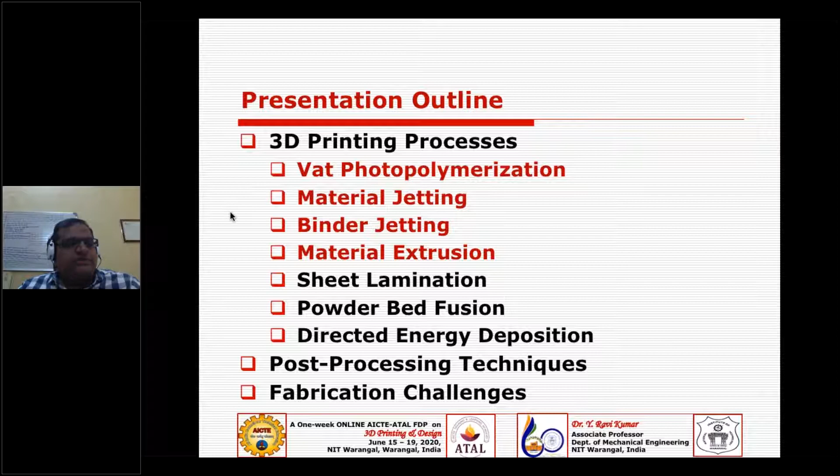So then we'll move on to the sheet lamination process. What do you mean by sheet lamination? The name itself tells you that the raw material may be taken in the form of a sheet, and you will be laminating those sheets. So what are those sheets? You have the raw material in the form of a sheet, either paper, composite, or even metal nowadays.

I'm going to even talk about some of the metal systems, from ultrasonic consolidation there is a process. Right from the beginning, I'm going to talk about the first generation LOM machine, which along with the SLA, from Helisys they have started this process called LOM, that is laminated object manufacturing. The name goes to Helisys, the early manufacturing systems developer from USA.

And then slowly it has moved to a different approach, from Helisys to MCOR. It's the Irish technology, where you are going to use a knife or inkjet printing combined to make the parts under this MCOR technology. That also we are going to see.

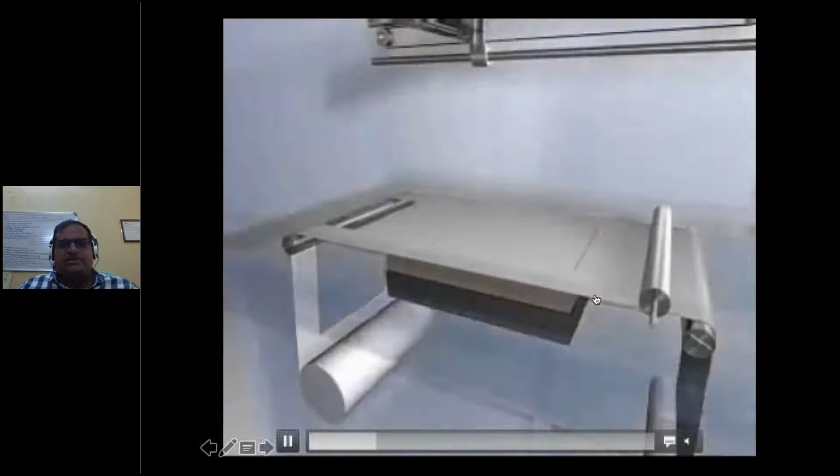A laser will be tracing the cross section, but this is a contrasting process. Normally using the laser, you cut the actual cross section, but here it is reverse - you cross hatch the system, leaving the cross section alone. That is a bit different process here, and because of that you may be wasting a lot of material.

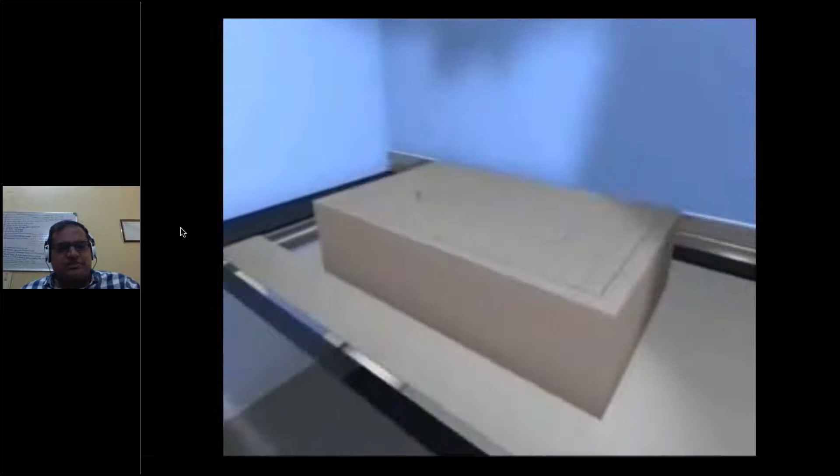Normally you claim that additive manufacturing is 0% scrap, but that statement should be exempted for this technology. Why? Because you are going to have more scrap here, since you are cross hatching the object rather than depositing the actual cross section. So this is about the Helisys LOM process where they started.

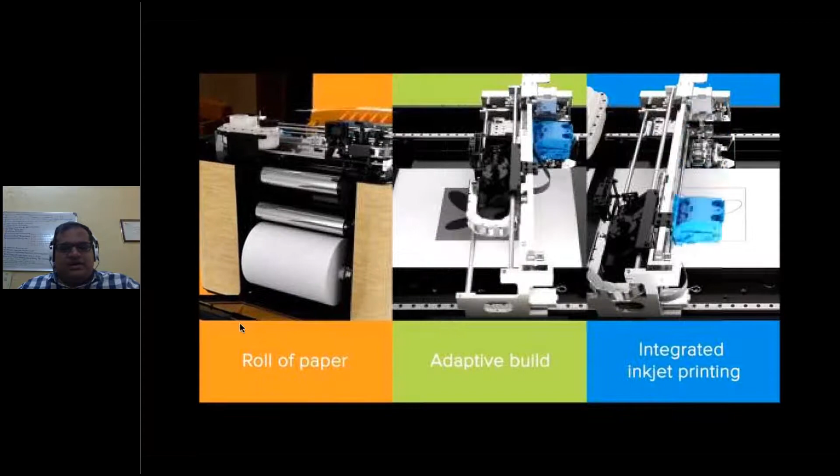Now there is a recent development from MCOR. This technology basically takes ordinary paper as the raw material. The printer looks something like a Xerox machine size, or a big size printer, or an all-in-one. Here the raw material will be paper, and then you will be additively building.

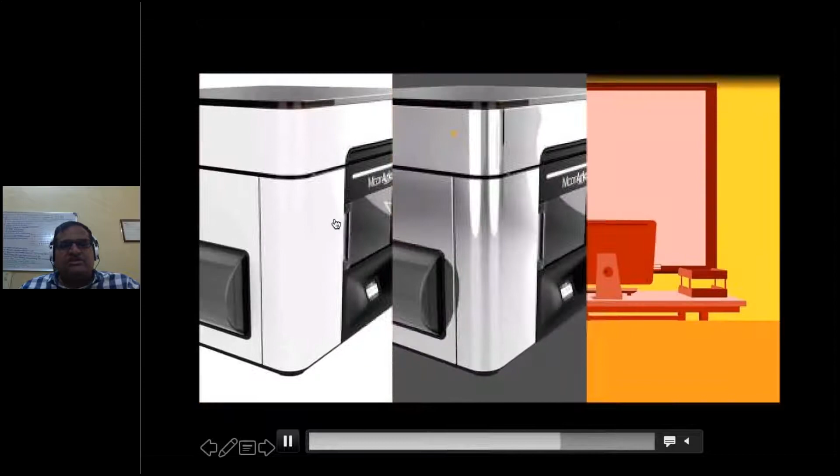You have some integrated inkjet printing also to give the colors. So it is the combination of adding or sticking the papers together, and then jetting the ink in colors - all in a colorful world. It's a less expensive machine, because you may be using something like ordinary paper as raw material and colored ink.

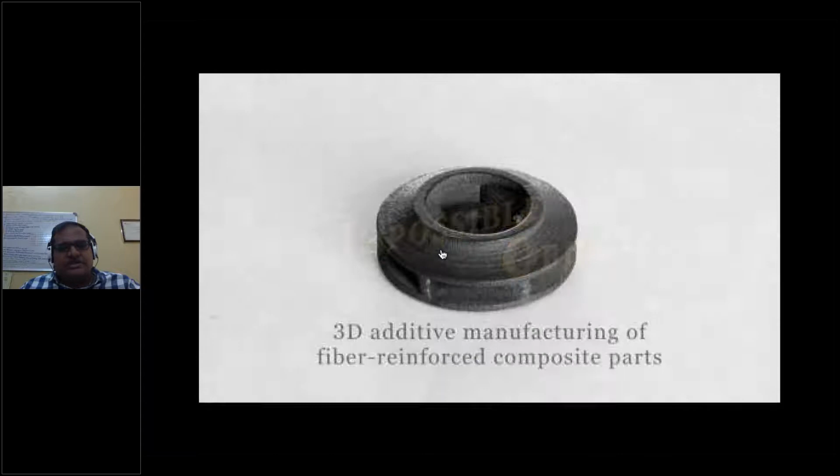So this is about the technology called MCOR. If you see the material developments, from paper you are now able to print fiber reinforced composites with the sheet lamination process - that is with the Impossible Objects technology. We can see the fiber reinforced composite as printed from this technology.

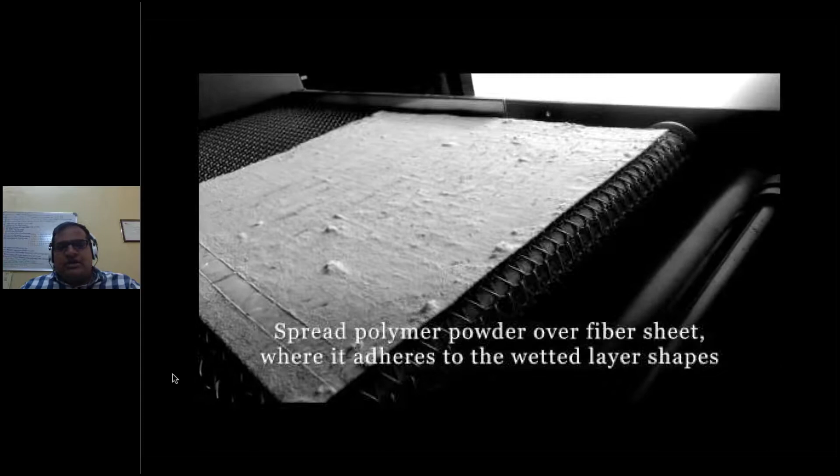Of course any technology should start with a CAD model, and then you have a fiber sheet to be printed. You use the inkjet heads to contain wetting fluid and jet it onto this fiber sheet, and spread a polymer powder on top of this fiber sheet, where it will be adhered. You remove the non-adhered powders, and then you can see all these bitmap files get printed.

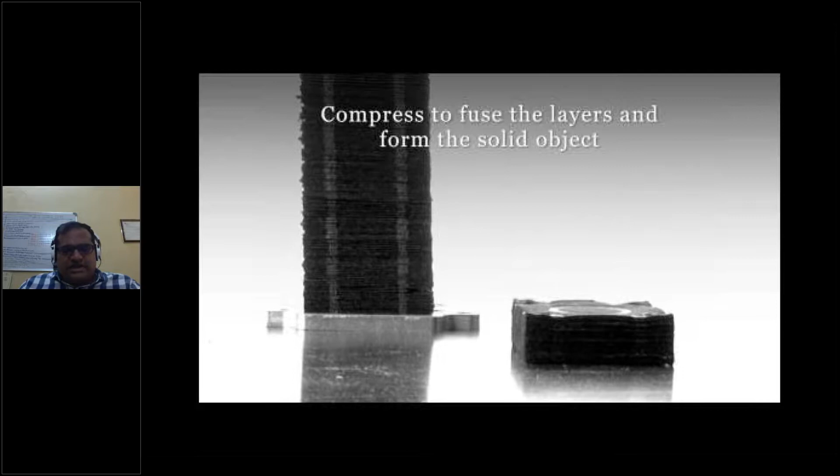Now you take all the individual sheets and stack them together, and put it into the post processing unit where you compress it. After compressing, you remove the uncoated fibers, and once you remove that, you are left with a fiber composite. So this is how it works - that is the development from paper to composites.

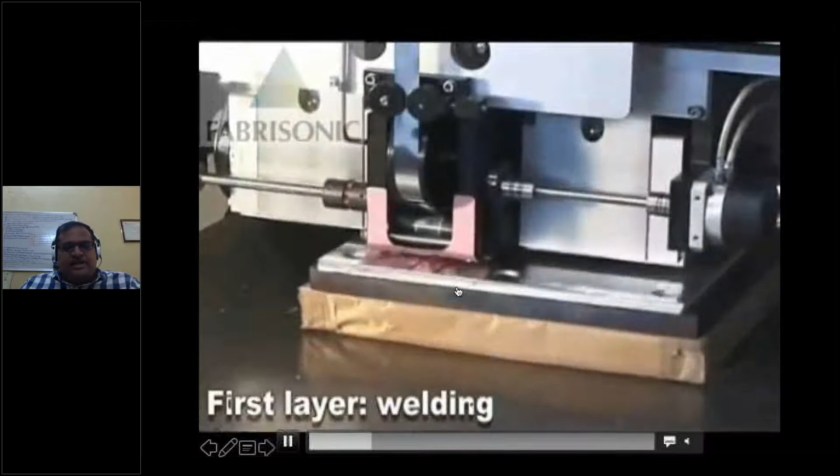Of course, now you can also print in metal. It's a bit of a hybrid process here, where you will be using even machining, using an end mill cutter also in between. First it starts with welding - by using ultrasonic welding, you join these metal tapes together, followed by an end mill cutter removing the excess portion or trimming.

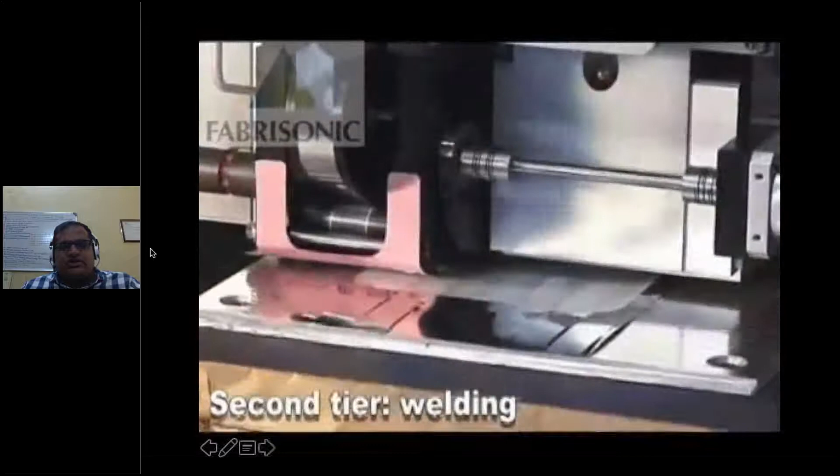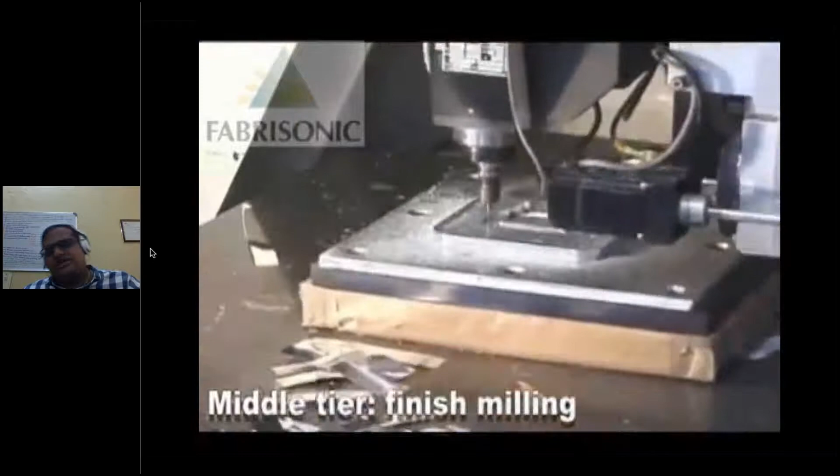So you get the advantages of both additive and subtractive here. You are adding these metal tapes together by welding, and removing or finishing is done with the end mill cutters. We need to even run the CNC program, generate the CNC program to run the end mill cutting. We can see this is going on right now, the welding process, and wherever there is subtractive, definitely you have a lot of scrap involved.

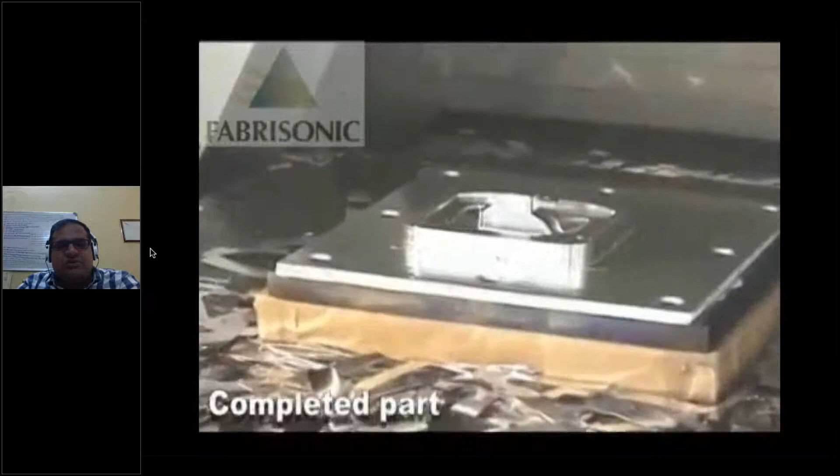We can see this is going to build layer by layer with the metal tapes, and finally you end up with a metal part, which started with a CAD model, a digital model of the mold. Now we can see this is the CAD model, and that is the metal die.

So these are the developments under this sheet lamination process, and we'll see one by one. As I mentioned, LOM was the previous technology where carbon dioxide laser used to be the energy source to cross hatch the cross sections of the model derived from the CAD.

During post processing, you remove these cross hatched cubes, normally called the decubing process. The person doing post processing must know about the geometry, otherwise he may erroneously cut the actual cross section, which becomes a challenge for the person doing the decubing process.

This is basically one of the initial processes, and I am proud to say that I used this machine during my postdoc in the US. Right now you cannot find these machines, they got outdated, but these were the earlier machines. In India also there were one or two machines, including one at Anna University, though I don't know if it's working now. But LOM is one of the first among the first generation 3D printers.

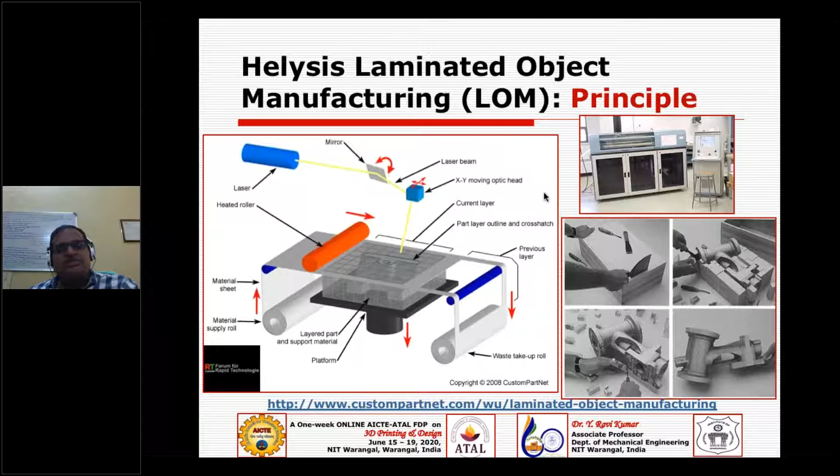So then there were a lot of developments. From MCOR, where paper is the raw material, by using inkjet colors you could make different colors. This is otherwise called selective deposition lamination, or SDL, where you can make colored, very realistic looking parts.

This process starts with taking a paper, using a printer adhesive, and through an inkjet printer you print that ink onto the paper. Then you laminate those papers and cut the excess portion through a knife, not a laser. Earlier people used a laser, but laser is a costly element. Then people realized cutting paper doesn't require a laser, and using a knife is sufficient. That's why nowadays these machines are very cheap.

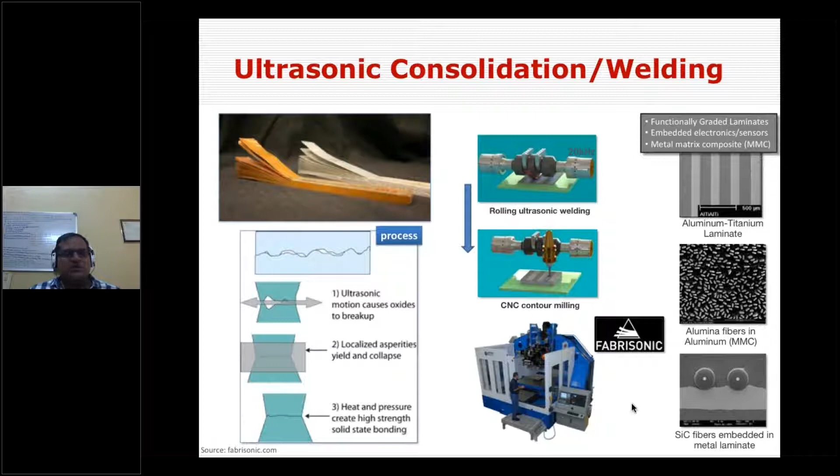I may be very crisp or brief, because I have to cover other technologies, so I'll move on to the next process, which I already introduced through video.

All these are fiber reinforced composites, made through laminates. This is the process from Impossible Objects, the lamination of fiber reinforced composites, which is about the sheet lamination process. Next we move on to the next kind of process, powder bed fusion.

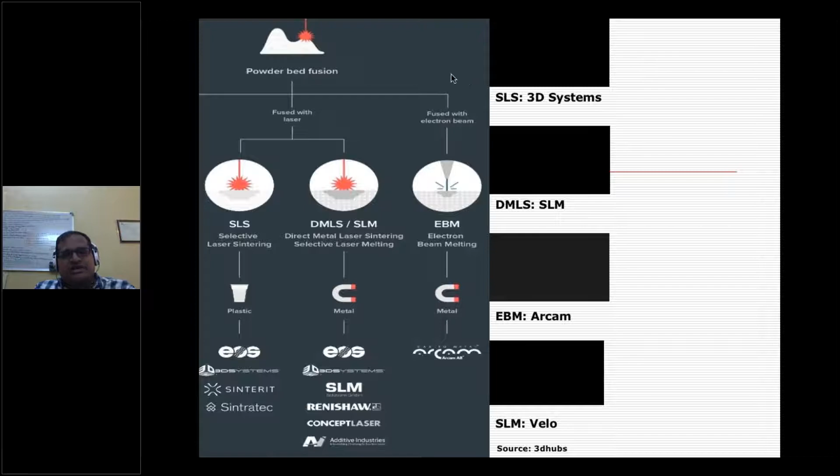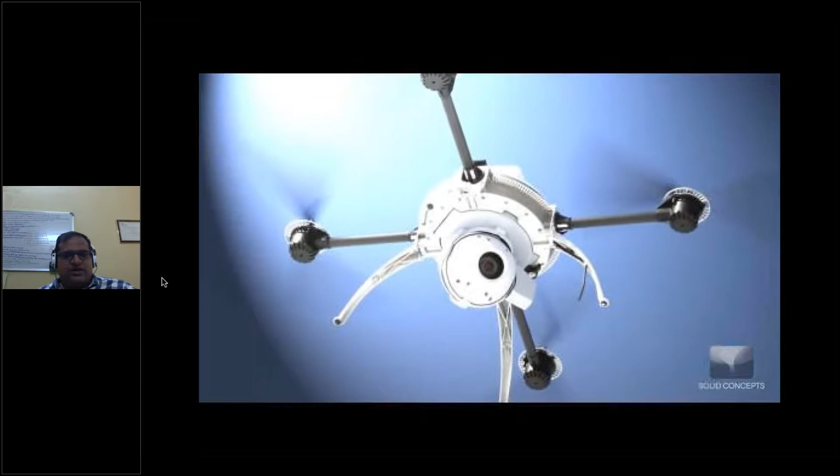We'll start with the early system from 3D Systems, called selective laser sintering. The raw material is powder, maybe around 50 to 100 micron size powders, and this is the SLS system. We start with raw material in powder form and lay a bed, since it's a powder bed system. From the powder you are able to get polymer parts, or basically composite parts. Predominantly it is polymer, but composite can also be done.

As usual, you start by taking the CAD file and slicing it, then send that data to the printer. In the printer you have a laser along with the powder bed recoater, which recoats the powder, and then the laser sinters your powder particles. By using laser power, you could sinter or melt the powder particles, getting bonding between them, and it goes layer by layer.

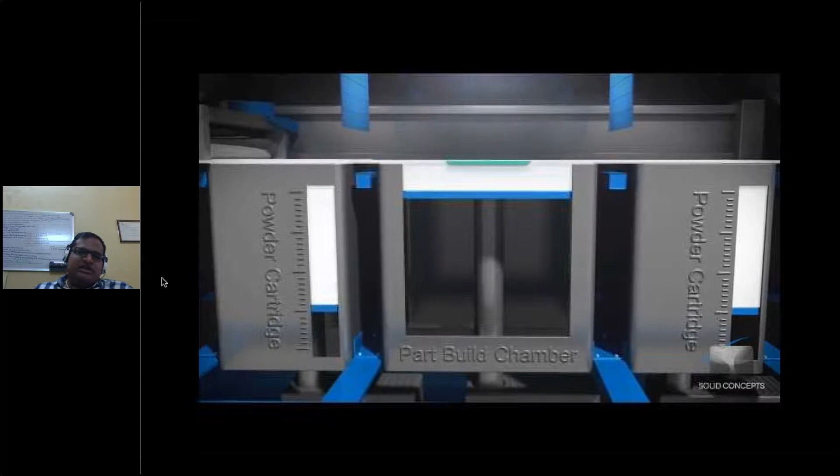So we can see where the part will be built at the middle, that is the part build chamber, and you have the powder cartridges on either side. While recoating, the excess powder will be collected on either side of the bin.

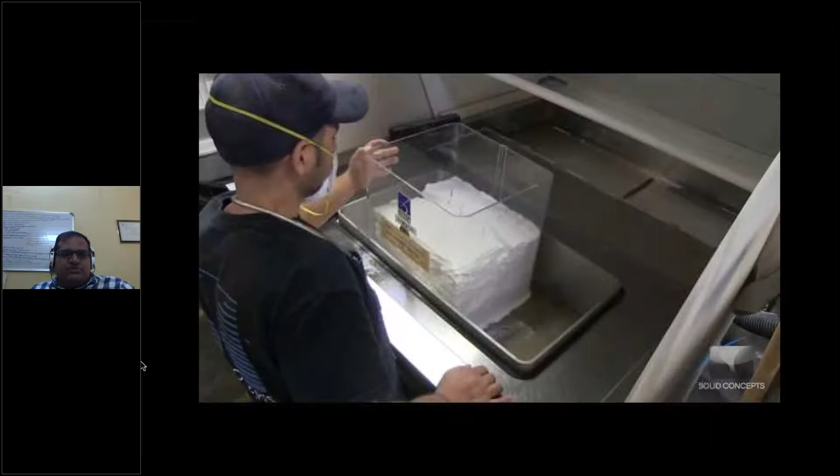Once you have done all these layers, you can unload the powder through the build chamber and take it out, where you find something like a cake of powder. From the cake of powder, you remove the loose powder and reuse it. From the bed of powder, you can see the actual part that got sintered.

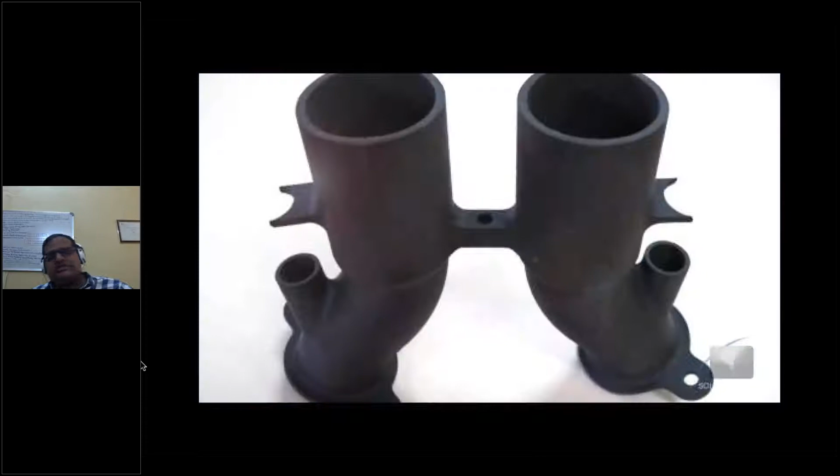So you get that part after post processing, which you can see. This kind of parts can be made. After post processing, you can see it has enhanced appearance, or maybe mechanical properties, microstructural properties, thermal properties, or electrical properties, whatever property you are looking at. So choose the appropriate post processing technique to improve your quality.

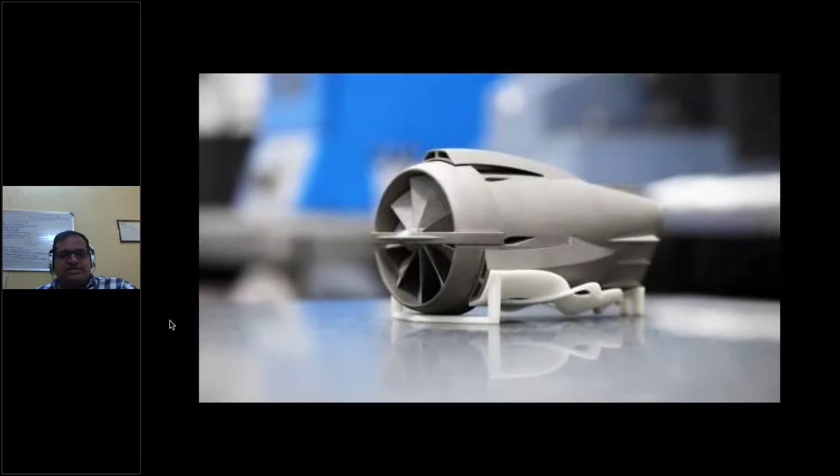Now we'll see the second generation machines, called direct metal laser sintering or SLM. These are the metal parts which you can see, and it works with the same principle. You have the raw material as a powder, but in this case it is not coated with a binder - it's direct metal powder, and it is getting melted. That's why it's called direct metal laser sintering, or selective laser melting - you are selectively melting from the bed of powder.

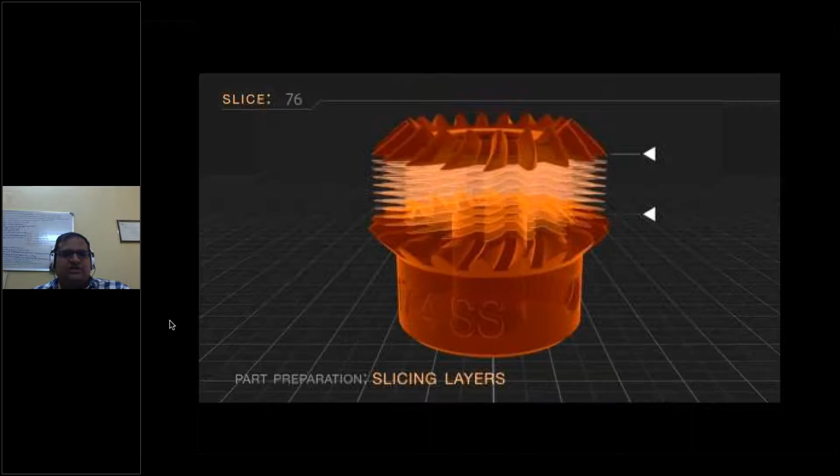As per the cross section, you will be melting. Any process starts with the CAD model, like the demo we gave on 3DXpert yesterday. Similarly, each machine supplier will supply their own software. Once you slice that model, you send the data to the machine. In the machine you have the laser and the recoater - the recoater will sweep the powder, and your laser will sinter, or rather melt, the powder particles.

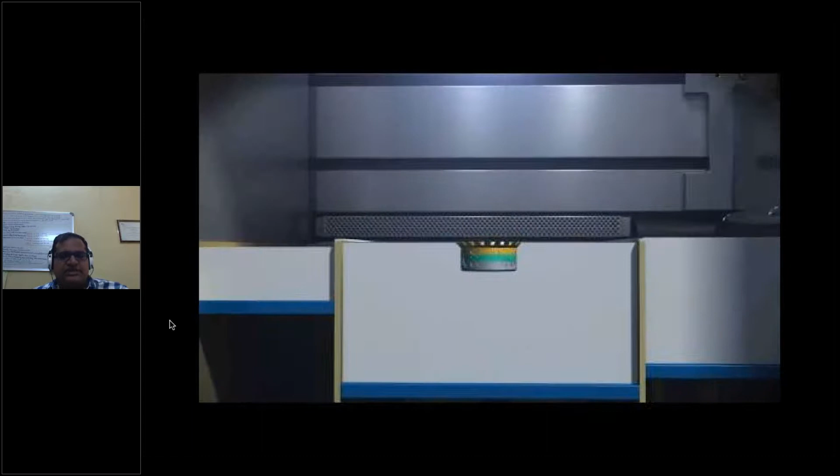There is a chance of oxides forming, because you are working with iron - iron oxide will form, titanium oxide will form. So there must be an inert gas. Normally in our lab, for reactive materials you must use argon as an inert gas, and for non-reactive materials you can use nitrogen, which is a bit cheaper than argon. You're supposed to use any one of these.

Once you've made this, you can see there are supports, and the supports are also metal, so you have to do a lot of post-processing here. To remove the metal supports from the substrate, we need to use blasting - sand blasting or air blasting. If not, it requires some super finishing operations also. Then finally your part is ready for application. So this is about direct metal laser sintering.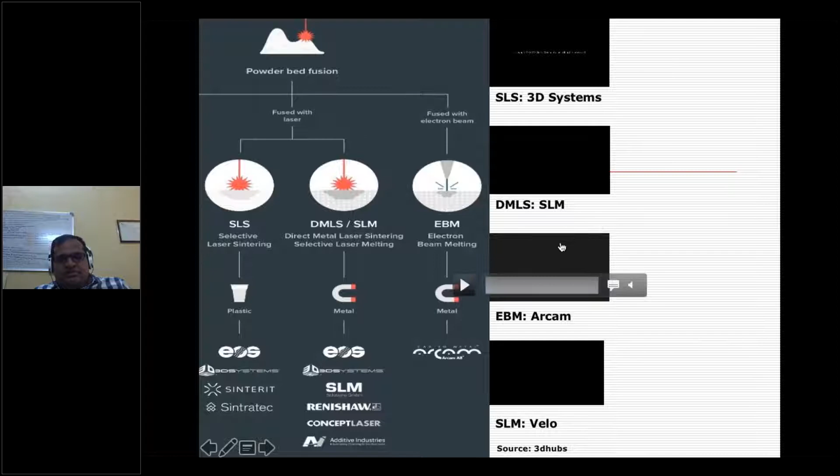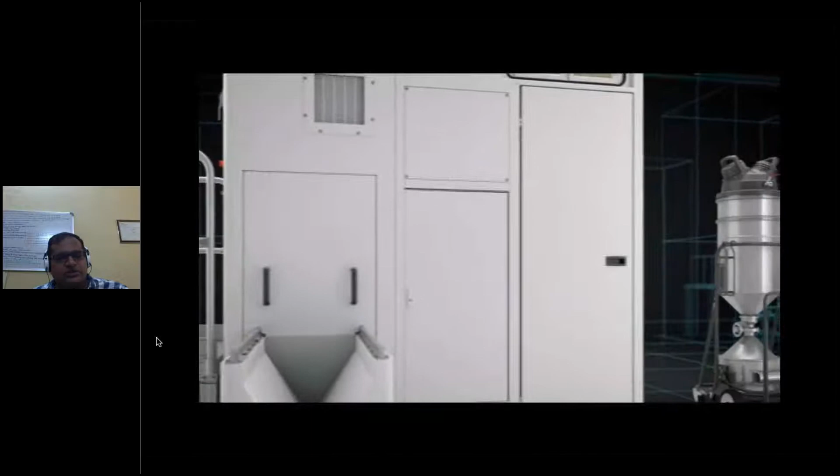As I already mentioned, so far we've seen only the laser in action, but you also have technology from Arcam, called EBM - electron beam melting. Here, the same powder is used, but one more challenge is, once you are operating with the electron beam, instead of inert gas you need to create a vacuum. Creating a vacuum is challenging, and not only challenging, it's very expensive compared to working with a laser. So you have a different ball game here with electron beam - you need a tight vacuum chamber. Recently GE has taken over this Arcam company, because GE is looking to make at least 50% of their parts through metal 3D printers.

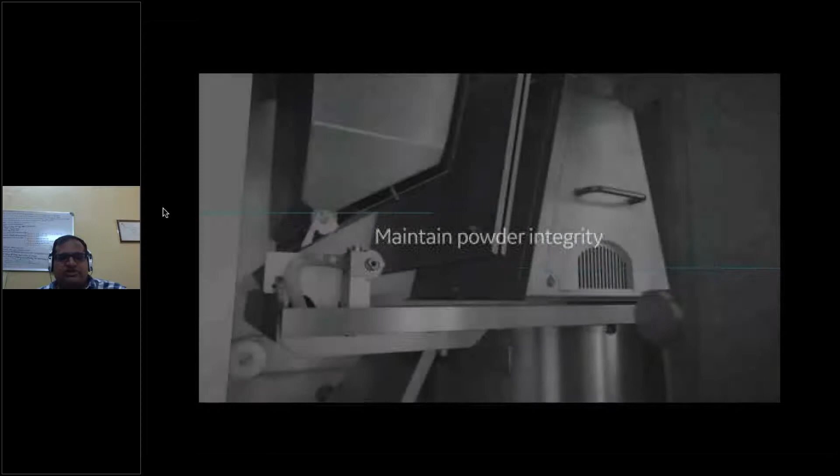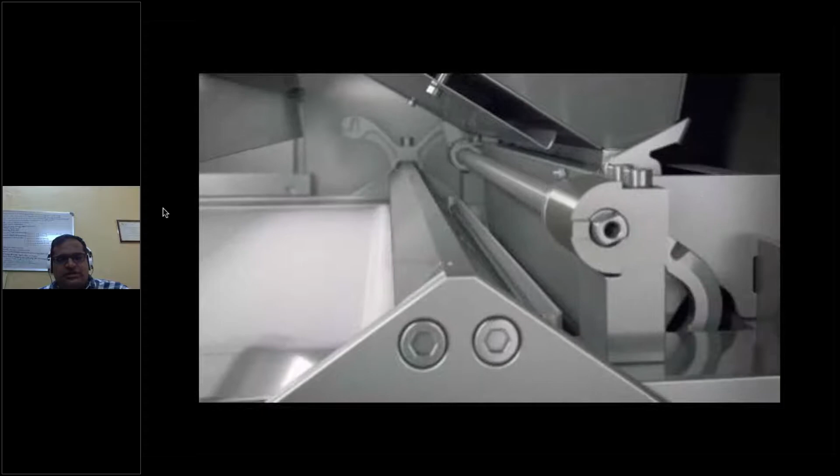Then we need to start with the powder, and as I mentioned, you have a vacuum chamber. You take the powder, it should be loaded here, and spread like the recoater, like with the previous system. The recoating system, there is no difference - you have a recoater which will spread the powder onto the bed. And of course, instead of a laser, now you have an electron beam.

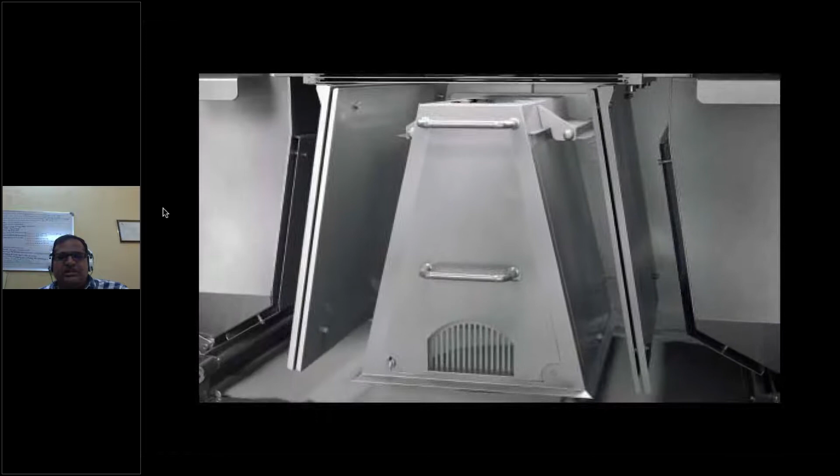Of course, this is the vacuum chamber, where everything is under vacuum, and the electrons will come and melt the material. You may be having a 6 kilowatt beam here, or otherwise you can have a build speed up to 50% faster. Now you can see the electrons are in action.

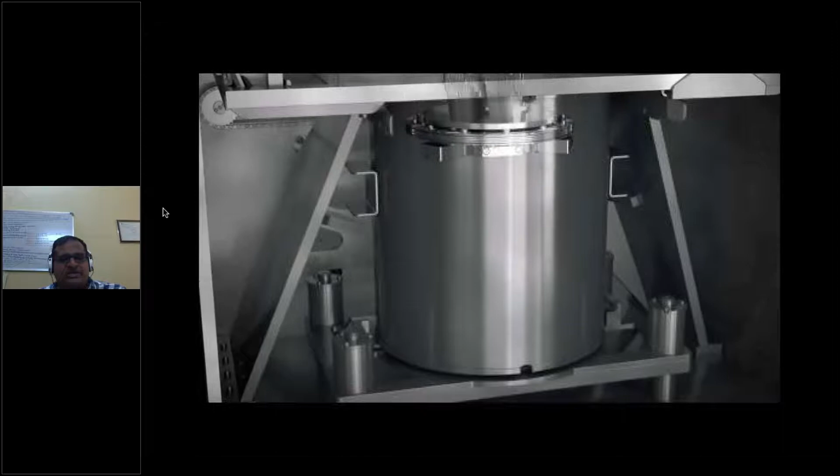So instead of laser, you have electron beams, which can have a 250 by 430 height, Z height build volume. This is a GE component, a blade for a gas turbine engine. So you can make this blade of the gas turbine engine using this process.

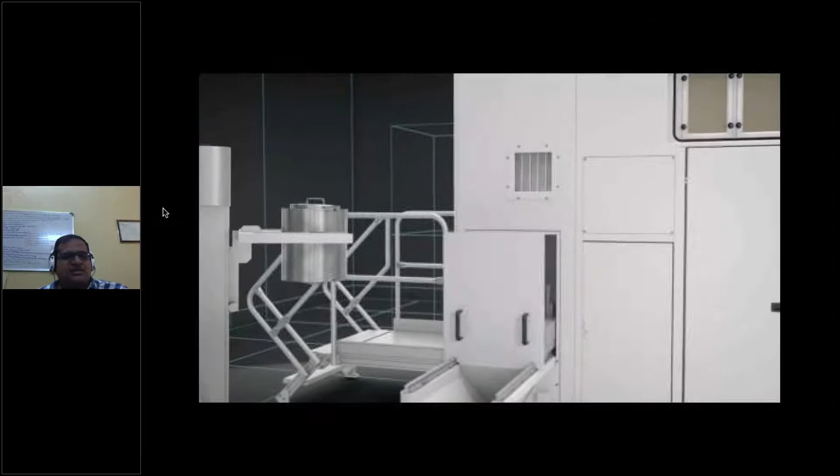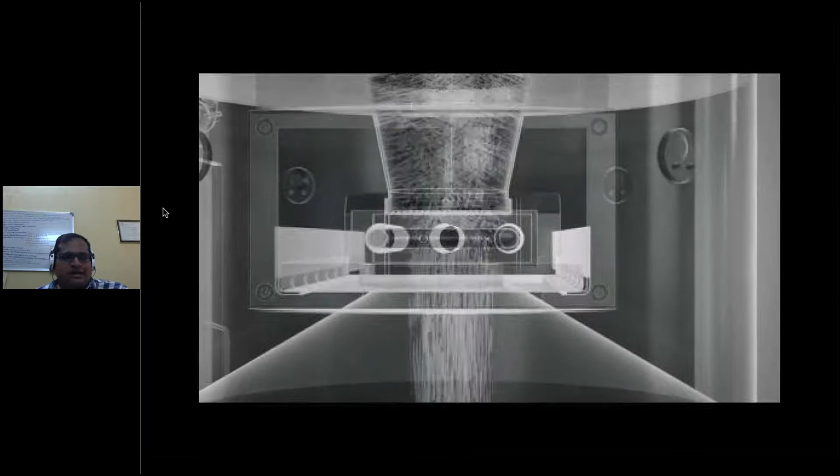There should not be any metallic or magnetic particles, as it will damage the system, since you are using electron beam. You do not take such extra care with laser, but you have to take extra care with electron beam.

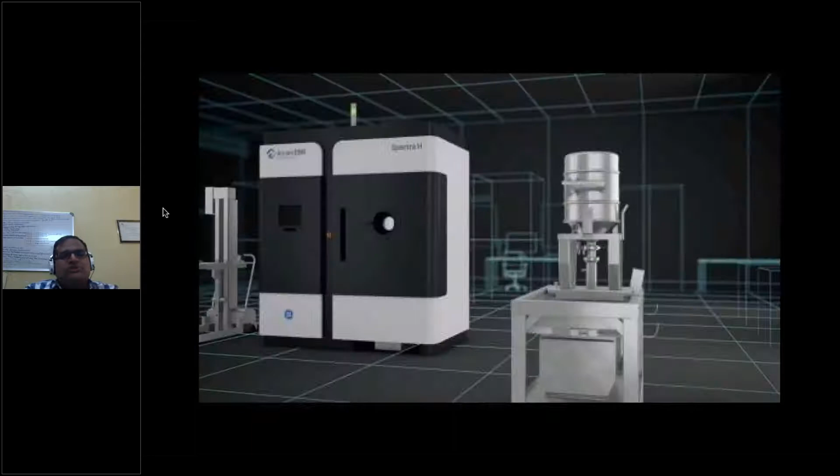So this is about the electron beam melting process from Arcam, now it is GE. This is a setup where we can see the raw material, the powder processing station, the post processing station, and of course the 3D printer. So this is about the EBM Arcam technology, where you are using metals processing through electron beams.

And there is even another system I didn't include here, because this is very recent, under development, with only one or two machines coming out from Velo. Velo is the company, and their aim is to eliminate the supports. That's what they are quoting, but I'm not sure how they are going to eliminate the supports. Supports are the biggest challenge for any metal 3D printing, that we have also been facing here.

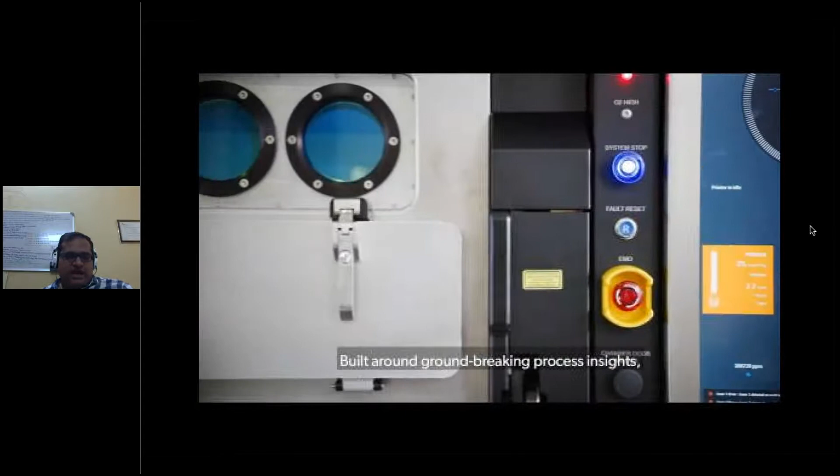So they have a different approach to tackle the support structure, and we can see some of the parts here. This is a sapphire laser they are using, the Velo3D Sapphire solutions. We can see all these are very rugged and robust designs of all these machines.

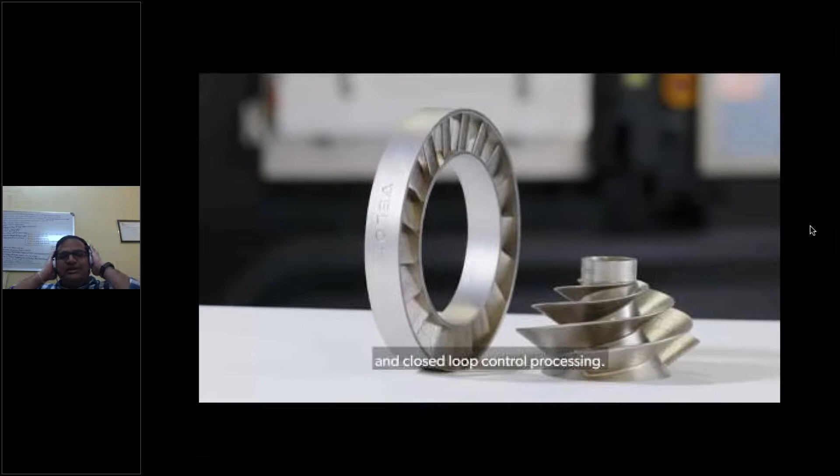Any 3D printing system has to start with a CAD model, and they are calling it an intelligent system, with artificial intelligence also incorporated, maybe especially for the support structures. Anyway, below 45 degrees it requires supports for any metal 3D printing system.

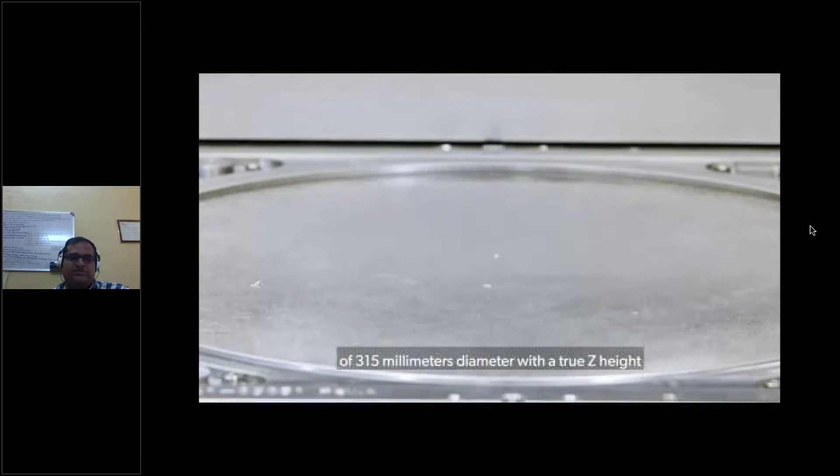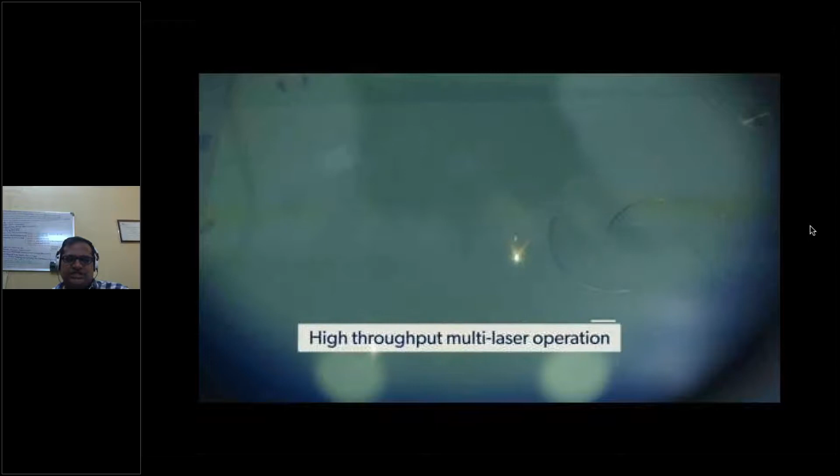These are processed using high throughput and multi-laser operation. They are not using a single laser. Multi-laser adds to the cost of the machine, and these machines are already very costly, but they say they are incorporating a closed loop system.

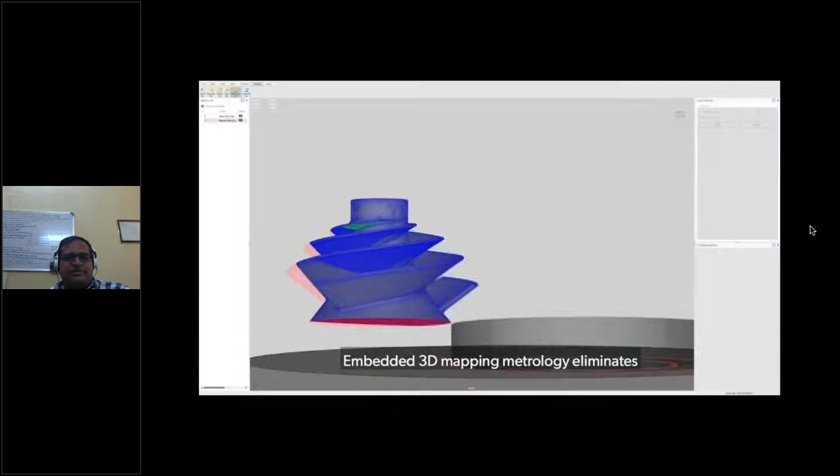The advantage of the closed loop system is that you can automatically vary the process parameters, ensuring the melt pool is maintained properly so you can get better properties. We can also see they have an automatic powder feeding system with cartridges.

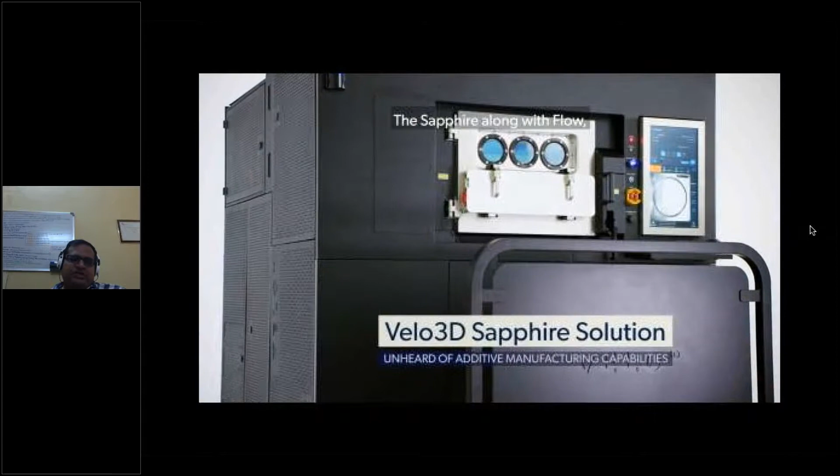This is basically for a production system, meaning not just one or two parts, but daily production. As I mentioned, aerospace people want to make it in mass, or at least batch production, which we cannot really call mass, because your aircraft may be in hundreds or thousands, not more than that, but definitely a batch production is needed.

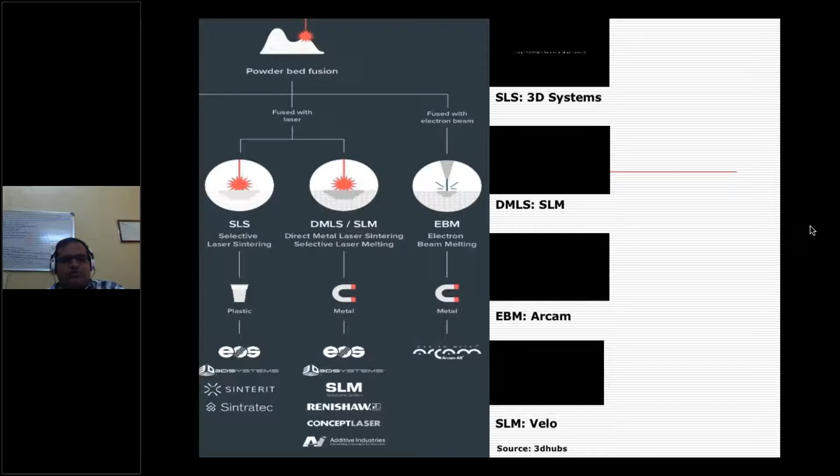And then you can use these parts. This is going to be the future technology, where we can even overcome the challenges of the current generation. Now we can say that the third generation machines are coming up.

As I mentioned, SLS or SLM can process polymers, metals, and ceramics, anything you bring in the form of a powder. The layer thickness will go 15 to 500 microns, and the powder particle size is 60 to 90 microns.

That is the typical powder. We'll have an exclusive session, followed by my session, on how to make these powders through atomizers or plasma or other methods, and how to achieve powder flowability. Professor Manjay is going to talk right after my presentation.

So you have the parameters like laser power, scan speed, layer orientation, and hatch distance. These are normally the most affected parameters on the quality of any SLM or SLS system.

Some examples: nylon duct for automobile manifolds, a titanium bracket for Airbus applications, and EBM titanium aluminum turbine blades. We just saw this same component in that video, and 62 EBM machines are operating by GE. They installed these machines across the globe last year, in 2013.

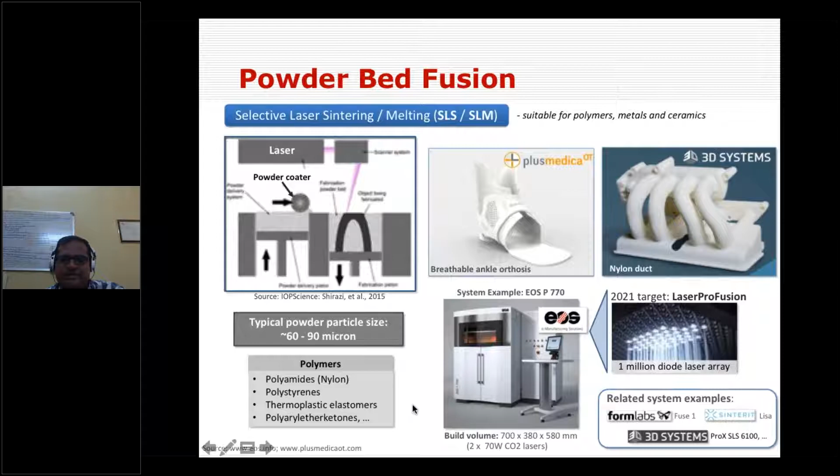So you have these parts from different companies. EOS is another company, where you may use polymers like nylon, polystyrene, thermoplastic elastomer, or other plastic materials. These are case studies from companies like EOS, 3D Systems, or Sinterit.

As I mentioned, in EBM, electron beam melting, the same powder is spread, and you have an electron beam, a vacuum chamber, and a filament. To generate electrons, you need a tungsten filament normally, along with a grid cup and anode, producing a stream of electrons controlled through the spot size.

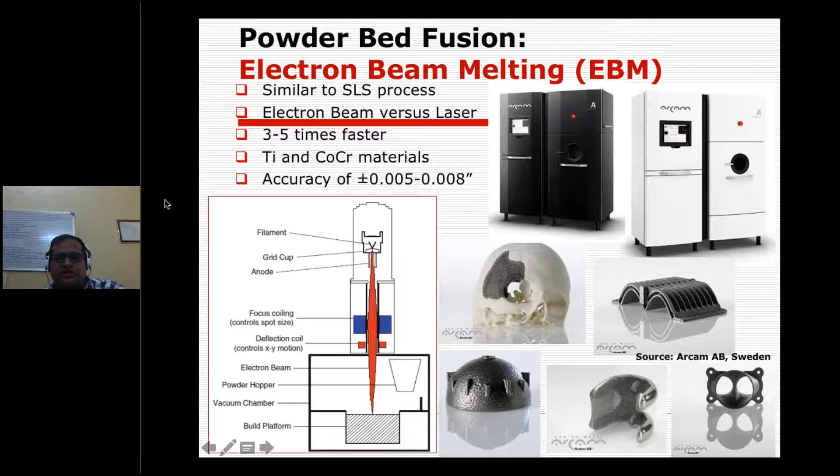These are some machines from Arcam, and these are parts printed with the Arcam machine, shown as built. You may not get the best quality as-built, but after post-processing you can definitely improve the surface finish and overall quality of the parts.

There is a very recent technology coming out from Desktop Metal, and also NXT Factory where they may use 4 lasers for this. Desktop Metal never uses any laser - basically it is a binder jetting and powder bed combination system.

But what I've given here is a different concept from Aurora Labs. They have a metal powder and a recoating system - they have come out with a novel recoating tool. Normally recoating is done prior to scanning, but what these guys are claiming is that you can do recoating and scanning simultaneously. That will save 50 to 60% or more of the build time - we can expect this to be quicker than current generation machines. So there is multiple layer deposition and fusing in a single pass.

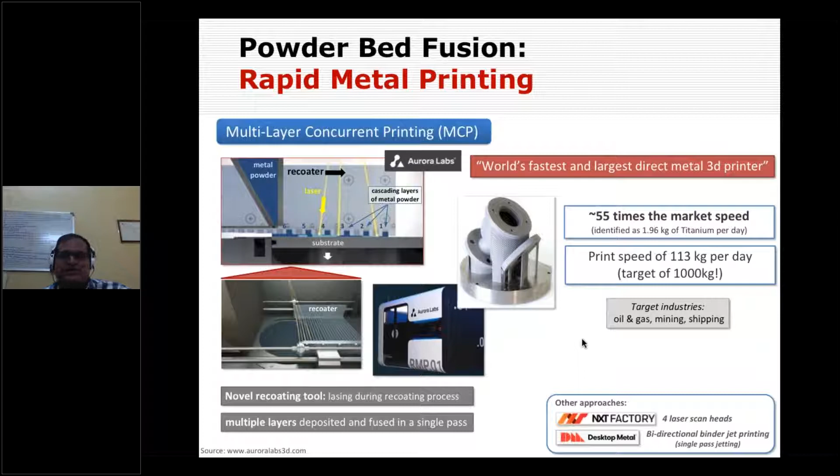If you compare these figures with normal welding like TIG or MIG, it may be a bit less, but people are ready to compete with those speeds now. As of now, these are still slow.

Now I will move on to the last technology, that is directed energy deposition. What is the difference between the earlier powder bed system and directed energy deposition? As the name suggests, earlier you laid the bed, but here you are no longer laying the bed - instead you are depositing as per the demand, directly depositing the powder as required.

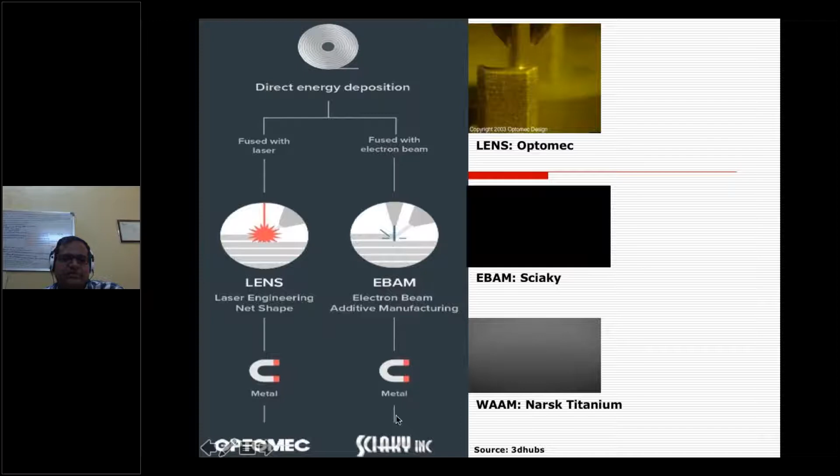The other one is Electron Beam Additive Manufacturing called EBAM from Sciaky - this is also for metal. Let us see the working principles of these.

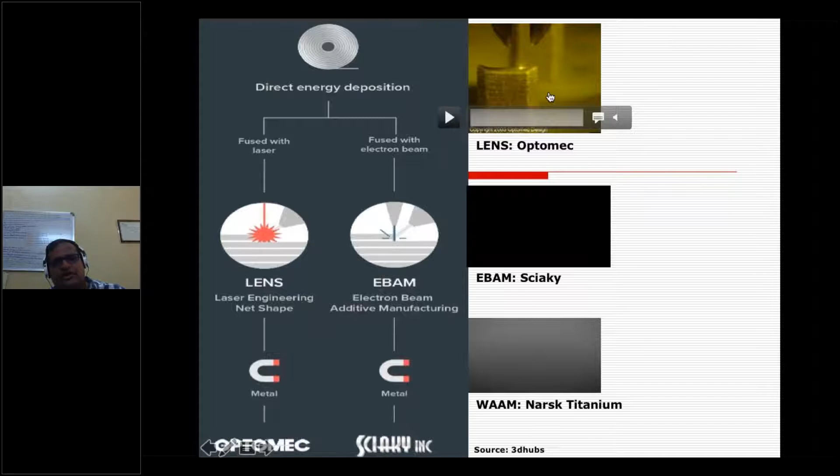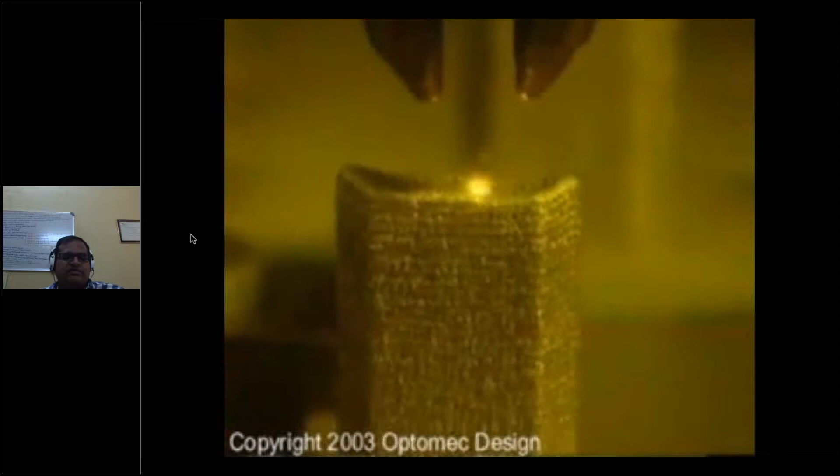First let us talk about the LENS system from Optomec. What happens here is the powder comes through a nozzle instead of being laid, in contrast with the earlier powder bed technology. Here it is simultaneous - it looks like welding. In TIG or MIG welding, you create an arc.

Here also you are creating an arc through a high-powered laser. From that high-powered laser you create the arc and keep on supplying the powder from the nozzles. So that is one thing.

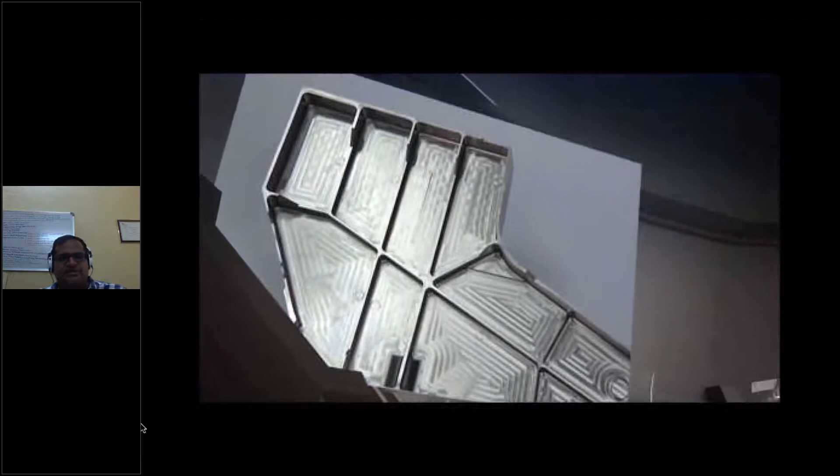Now if you see Sciaky, it is the electron beam source. Instead of laser, which Optomec uses, Sciaky uses an electron beam as the energy source. So you start with powder as the raw material, along with the design, and this is the metal part which we can see. Electron beam comes into action, and you simultaneously pump the powder while the electron beam is active, generating a melt pool or arc while continuously supplying raw material.

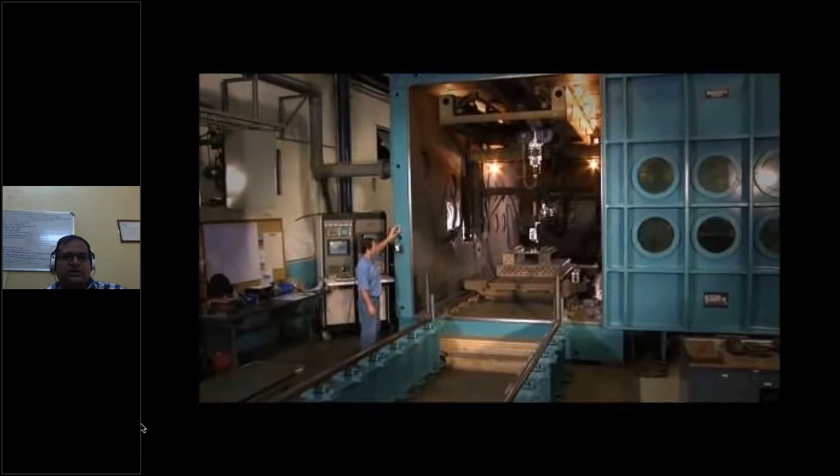So the metal, now you can see Inconel, titanium, tantalum. It will support all these materials, which you feed through the system. You pump the raw material, and the electron beam follows along with it.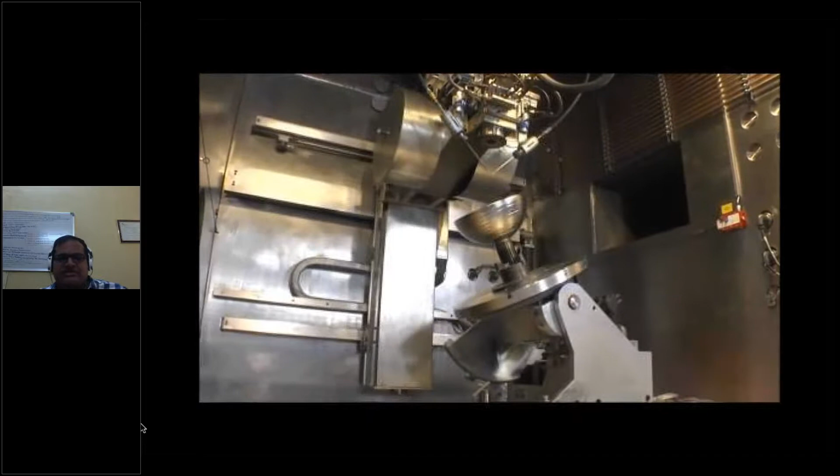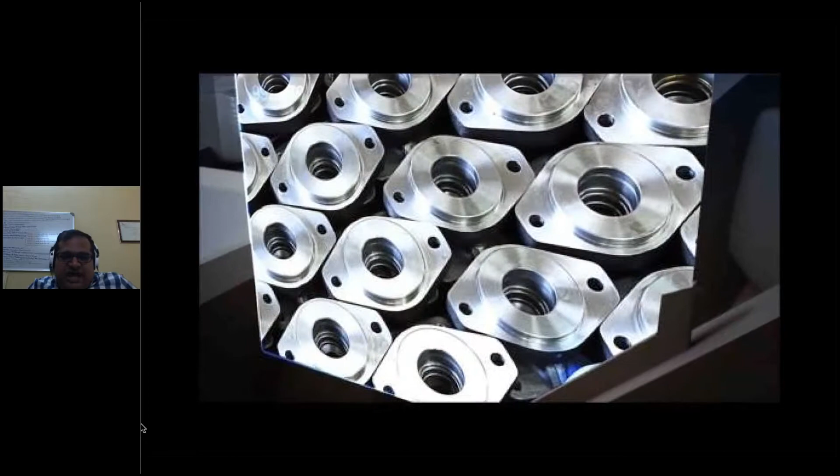And you have 5-axis systems nowadays, where you can rotate your table similar to a CNC 5-axis machine. Here also you are able to rotate these tables with 5 degrees of freedom, which helps eliminate the support problem. It works like a 5-axis CNC machine, but the accuracy may not be as good as what you saw previously - it's a near net shape we are going to get.

And it should be followed by some post-processing. Companies like Lockheed, GE, or Boeing are all adopting these technologies.

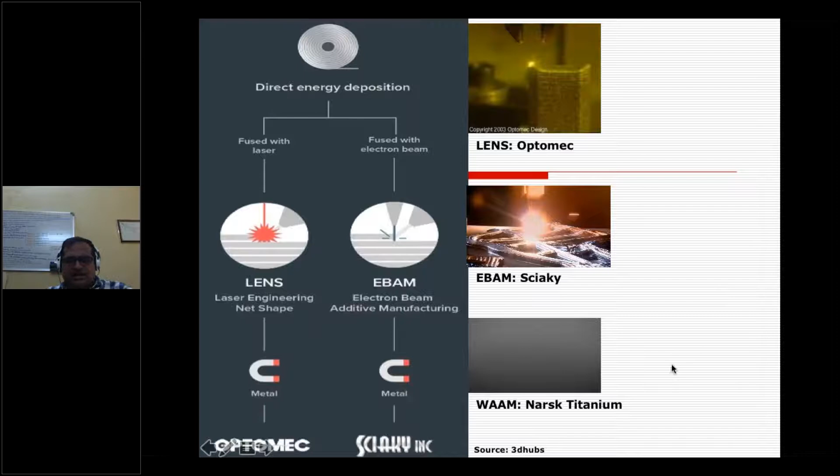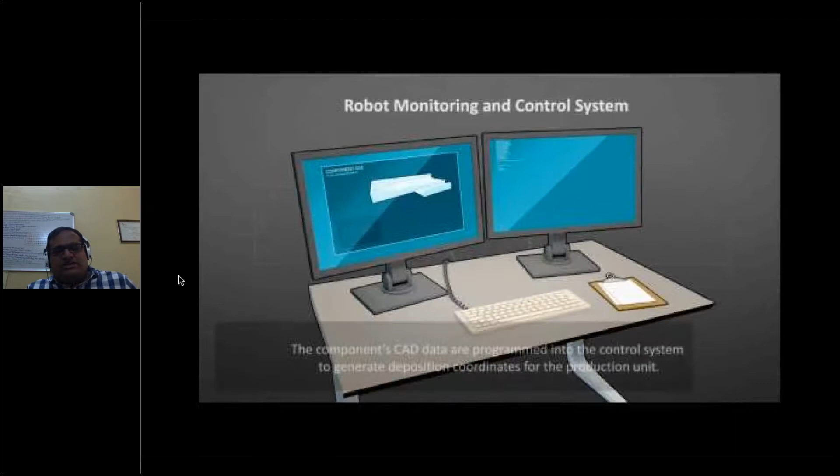We have another process called wire arc AM - our next speaker will cover this in detail, but I'll give you a glimpse. Here you can bring in the raw material. So far we've been discussing powder, but it can also be a wire fed into the system. Instead of powder, you take the raw material as a wire, though there are challenges once it's a wire. You still start with the CAD model, as in other 3D printing processes, and here you have a DMD production unit.

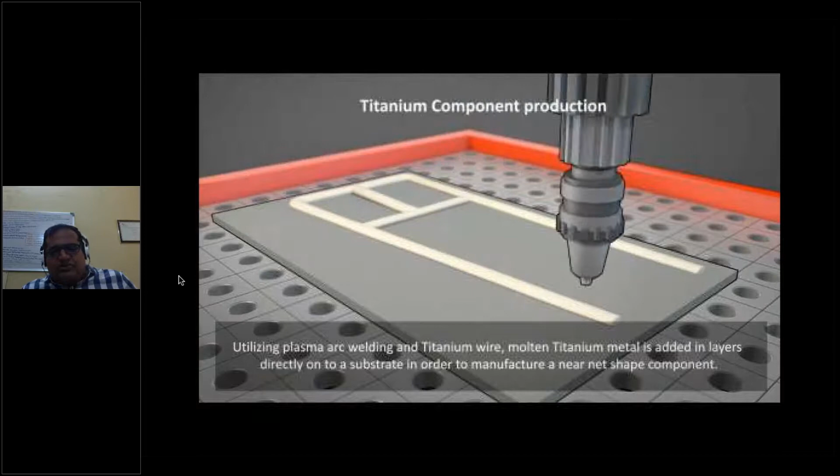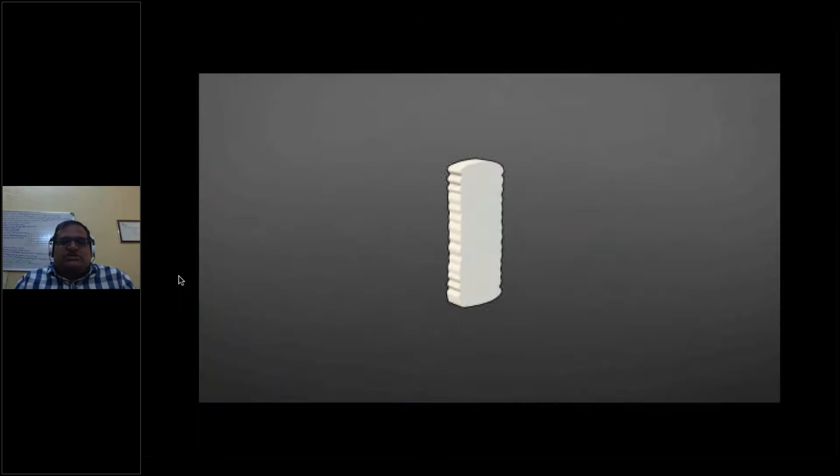You can see this is a plasma arc welding torch, and titanium wire - the metal in the form of a wire is brought here. You may not be using high-powered lasers for this; basically it's a plasma welding technique, very similar to welding. These are parts made using this technology, and we'll see a dedicated session on this.

So I hope I have given a glimpse of this technology.

So you have 5-axis freedom, as we just saw. The raw material can come in powder form, as seen here with metal powder, or it can be a wire - similar to TIG welding, as we just saw. These are all near net shaped parts, shown here in action.

One more advantage of DED is that you can do repairing and refurbishing. Someone was asking if we can use coating - yes, this is the technology where you can apply a coating. If you already have a machined part, a cast part, or a forged part, and you want to apply some other material coated on top of it, this is the right technology for you. You can use this technology for coating.

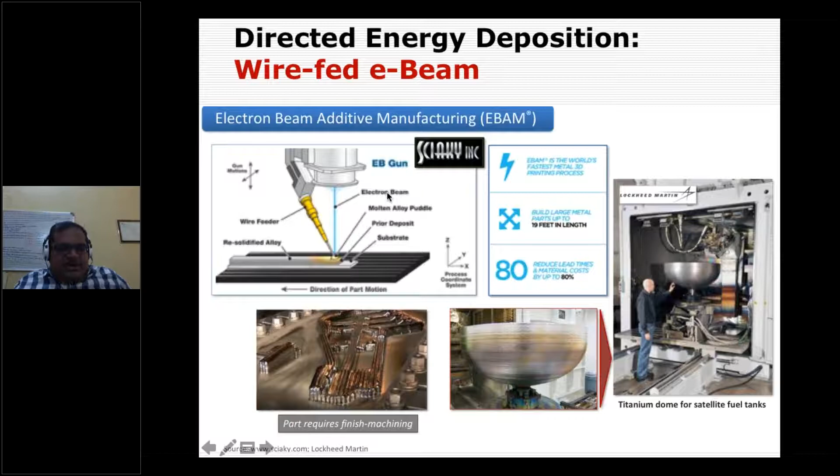And we just saw a video of Sciaky, the same system, where wire feeding happens with an electron beam at the center. These are the parts produced just now.

As I mentioned, there is one more speaker covering this topic. I don't want to step on his presentation or encroach on his material - I'm just giving you a glimpse of it.

And I have a cold spray. That's one more recent development. As we know, cold spray technique can process 45 kg of material per hour, so that is the speed. Otherwise, whatever we previously discussed, that may be typically 9 kg per hour. The e-beam melting process, that may be typically only 9 kg per hour, but now they are targeting 45 kg of powder melting per hour. So these are the developments happening under this technology.

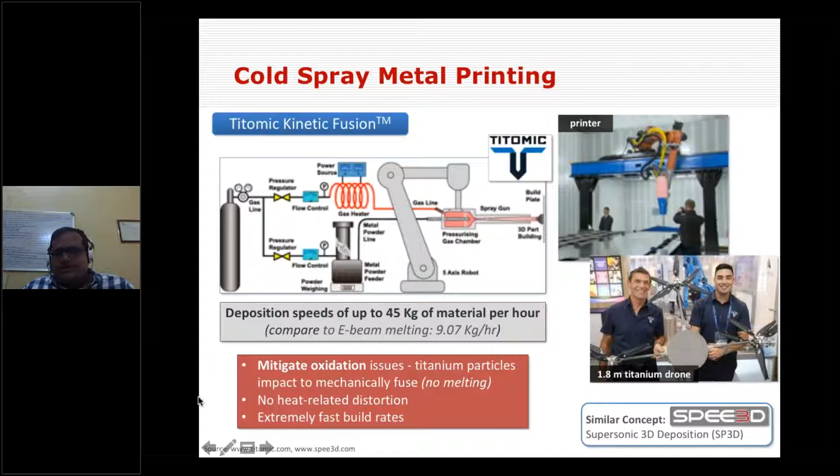Now let me come to the last part of my presentation, the post-processing techniques in AM. What kind of post-processing techniques are we going to use? The post-processing technique is 3D printing technology specific, so we cannot generalize it. Why? Because the raw material is not the same for all these processes.

You have powder as a raw material in one of the systems, and as we've just seen, it may be wire, or a sheet of paper or metal, or it may be liquid. So any form, or sometimes you may be atomizing it to get nanoparticles. So you have different raw material forms, and at the end of the day, you get the part.

But typically, if you talk about SLS and binder jetting, 70% of your part cost goes towards post-processing. That is the biggest challenge - how to minimize this post-processing cost. Especially SLS powder bed systems and binder jetting systems, these are the two main ones.

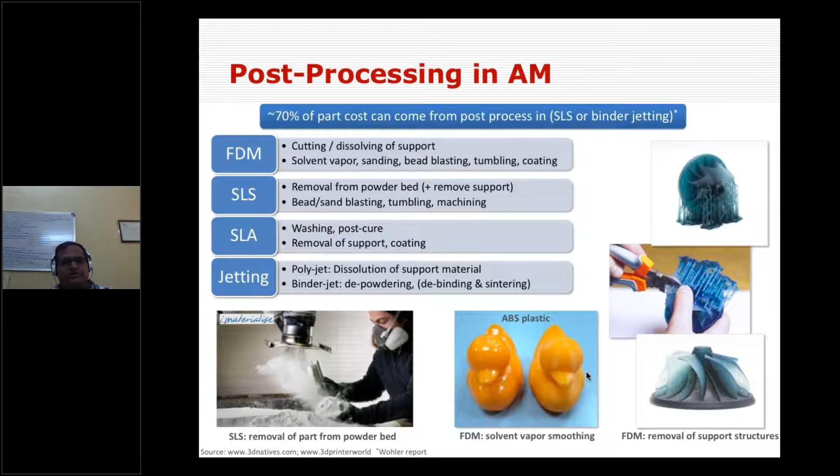So they have printed on top of the 3D printed metals or parts, either polymer for the FDM process, or even inkjet systems. Those parts will be given some kind of lettering or scan barcodes or whatnot. Even some kind of electronics can also be possible, and of course we have some automated post processing techniques in AM.

And of course you have some companies exclusively working on post processing services - they won't make any machines, but they have some post processing machines. So it may have some hybrid systems also.

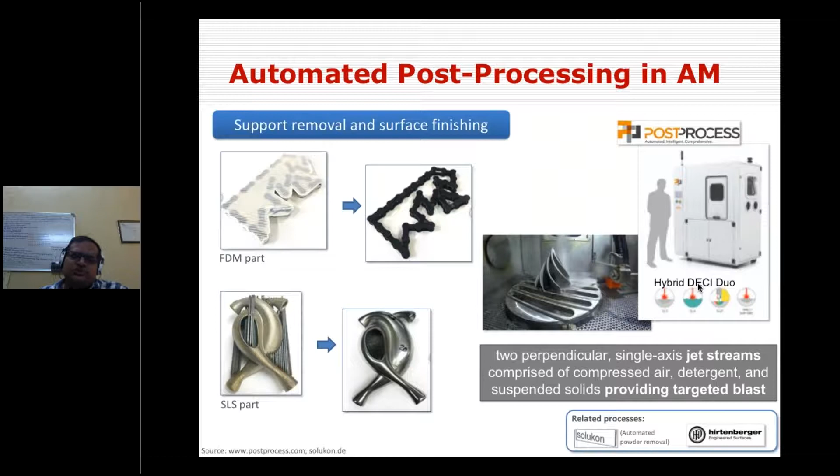So then you have post processing machines exclusively to do this, and of course you have service providers also to do this job.

And then why we want to go with post processing - as we know, as built you cannot, whatever I have already answered from the participants' questions, saying that it may be on par with casting or on par with forging, but that is subjected to post processing, after post processing. So why do you want to post process, and what are the limitations?

You see the other side of the coin of 3D printing - you have anisotropic properties, and we have a lot of list to discuss, but at least what we can do is improve corrosion resistance or oxidation resistance, or we need to improve surface friction or a kind of wear resistance.

And we need to improve tensile strength sometimes, so we need to improve bending fatigue, and we need to apply some kind of adhesions, cellular adhesions or biofilms, or appearance with some other properties. So it depends on the application.

So where that part will go - if it is a simple nut and bolt, you need not worry much about other aspects, but you may need to worry about some aspects. But if it is flying in an aircraft, altogether it's a different story.

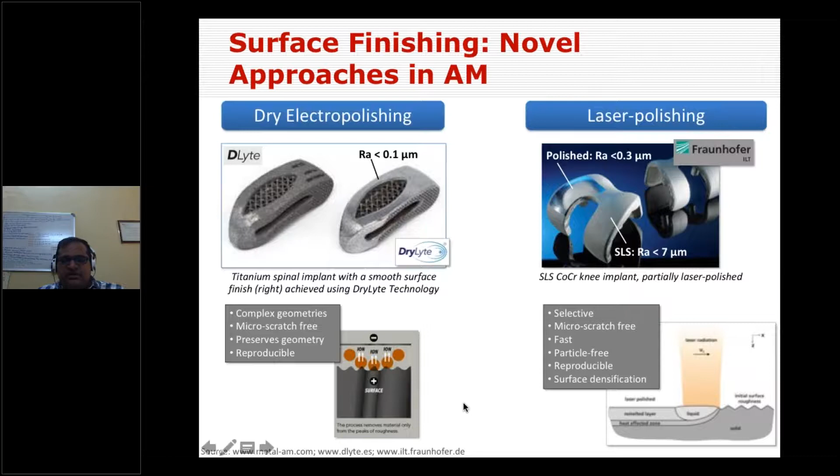You have complex geometries and micro scratch free, preserves geometry, and reproducibility. We need to selectively achieve micro scratch free components, with very fast, particle free, reproducible surface finishing and surface densification. My next slide will probably talk more about that.

The last topic is how to achieve 100% dense - that is the challenge. But no doubt, nowadays almost all AM processes, except one or two, under powder bed or DED, as-built you can achieve 95% dense. The old days are gone, but now third generation machines can achieve 95% density.

But still if you want 100%, since your application demands it, you go with HIPing, that is hot isostatic pressing. So you can use a HIP process, where we can see some entrapped powder or cracks may or may not be there.

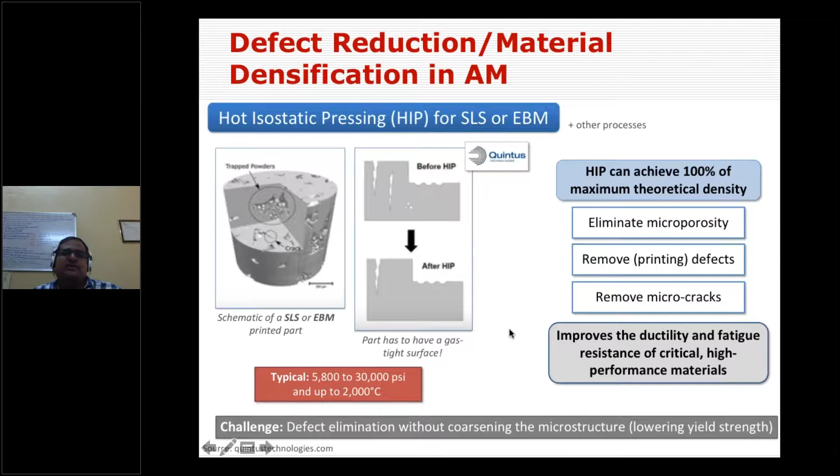But there are still challenges, such as defect elimination without coarsening the microstructure. That is the challenge here. But anyway, nevertheless, you have a provision, so you can do it.

So let me conclude my presentation with this slide. What are the fabrication challenges that current AM is facing? Let me put it this way: the challenges are many. The first challenge is standardization of the process.

First of all, I don't have ASTM standards to standardize things. And if I want to standardize, from machine to machine it is getting deviated, or you have a different mechanism or physics altogether. So you cannot generalize these things, because machine to machine it will vary, and even run to run, the consistency may not be the same.

So then there is a challenge: how to standardize these processes? Because you are getting deviation from run to run on the same machine, or machine to machine, or technology to technology, model to model. That is the challenge.

And then of course there will be a problem with the source of material or the raw material also, regarding consistency. Say you have a powder with a size range of 50 to 100 microns - how do you ensure you are going to get an average particle size in between that range? Are you able to get it? That is the challenge. The raw material itself - once you characterize your powder, are you able to get consistent properties or not?